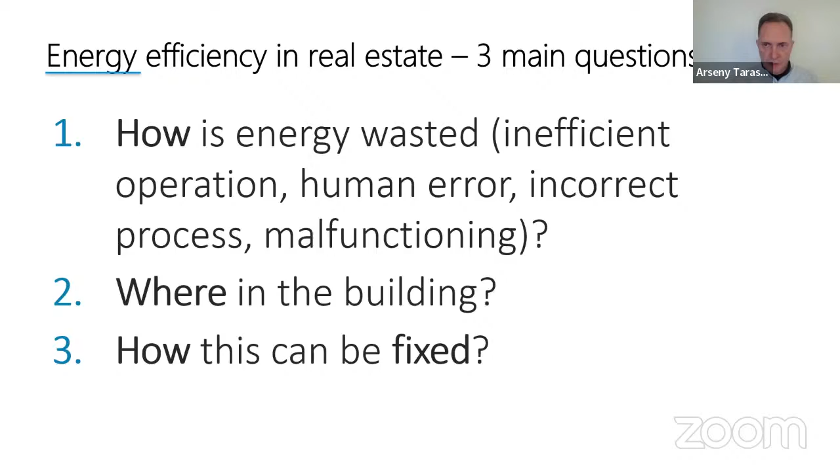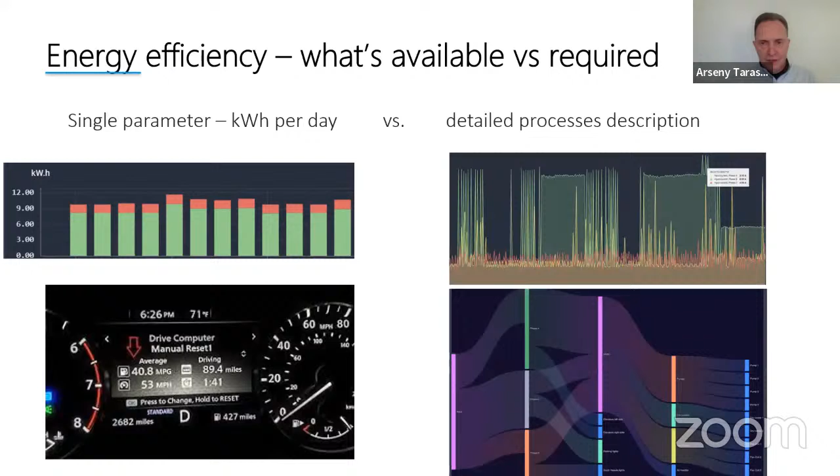A lot of companies say, okay, we will give you an energy management system, and what they give you is really just one parameter, which is how many kilowatt hours you consume per day. It's important to understand, but it's not really the way you can analyze and make qualified decisions on how to optimize energy efficiency. It's like understanding your average fuel consumption in a car; it doesn't really give you detailed information for detailed decision making and actions.

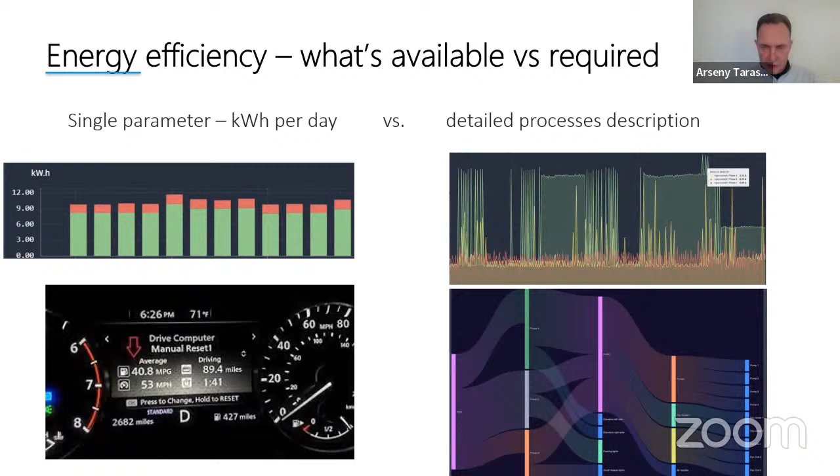But what you really need, in addition to that, is a full understanding of the processes happening in real time, energy distribution among different systems, so that based on this information you can make decisions and take actions. So this is the first thing.

Second thing is we see a lot of companies offering HVAC automation solutions. But in reality you need much more than that, because you need an overall energy processes management solution. If we talk about the car industry again, it's like offering just a chip tuning service compared to overall fleet management, fleet optimization, and route optimization. It's a complete solution, not just one process that needs to be taken care of. You need to look at the big picture to make sure everything is in tune and optimal. So this is very important.

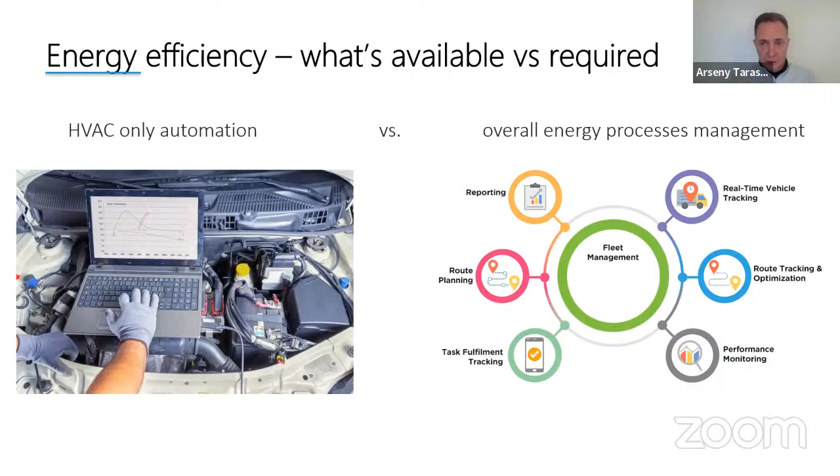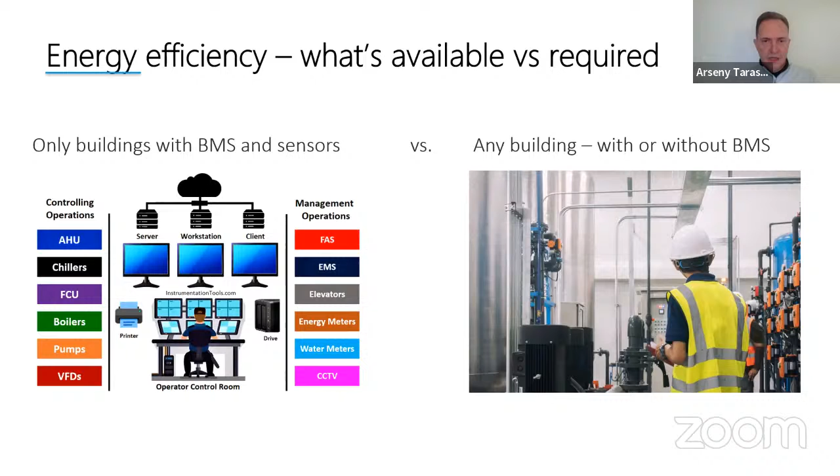Next topic: most of the solutions available right now require an existing BMS system and sensors implemented. But I would say the majority of the built environment doesn't have complicated and expensive BMS installed. However, these buildings also need energy efficiency actions and initiatives. So this is really a big issue we see in the industry.

Another reality we currently see in the market is that energy efficiency solutions seem to be only for new buildings, where you have all the fantastic systems and required equipment installed. But basically any building requires energy efficiency initiatives, and this is what's lacking in the market right now. That's why we focused on these important demands from the market and what's really missing, and that's why we came up with a solution that I will talk about right now.

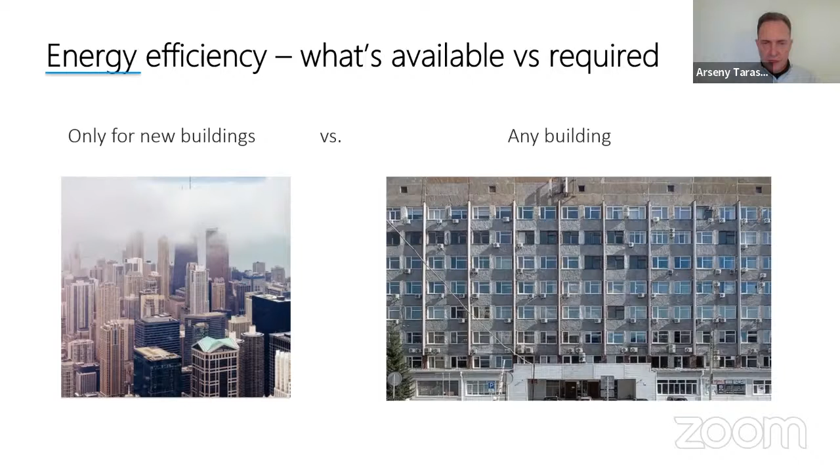If you look at the current challenges, in addition to what we've just discussed, it's really a lack of transparency. When you see that the building consumes too much energy, the question is, why is that? What is the cause? What's really happening inside the building, not just one number per month, but what's really going on. Normally with existing systems, it's very hard to understand and to get.

Second issue is that there aren't really a lot of professionals who can analyze the current situation and make decisions and corrective actions to improve it, because this was never a big issue before. Therefore, there are very few professionals who can do it.

Another important challenge we see is a lack of simple and affordable solutions that can solve energy efficiency problems and help decision makers implement cost optimization initiatives. There are super expensive systems, equipment, and services you can buy from the market, but this is not what most companies, especially smaller ones, need to run their energy efficiency initiatives.

In the end, energy efficiency is not just about the amount of energy you spend, but also about what kind of energy you consume in the buildings. This is another issue, as in Europe we've had a lot of concerns about the transition from gas to electricity and other sources of energy. This is also a big issue for the market. So we see these key concerns in addition to what I've just discussed.

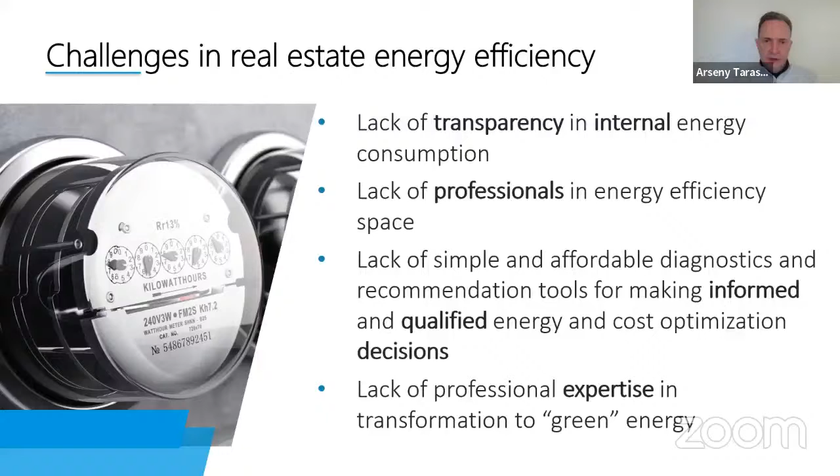Therefore, we have developed our own solution and platform that really focuses on these key ideas. First is creating cost-effective and non-intrusive big data collection, because, as we say, you cannot manage or optimize anything unless you measure it. So the collection of big data in any building is the main topic. The second approach is obviously real-time analytics and optimization based on the big data, which is really the foundation for future analysis and recommendations.

And we add on top of that our experience both in real estate design and maintenance, as well as digital industry experience. If you look at the medical care analogy, it's really like if you wanted to diagnose and heal someone, you could only have a very limited number of data points and measurements. But now with high performance sportsmen and high performance people, you can measure all the necessary healthcare data online using the newest technology, and then optimize the operations and the behavior. So this is super critical.

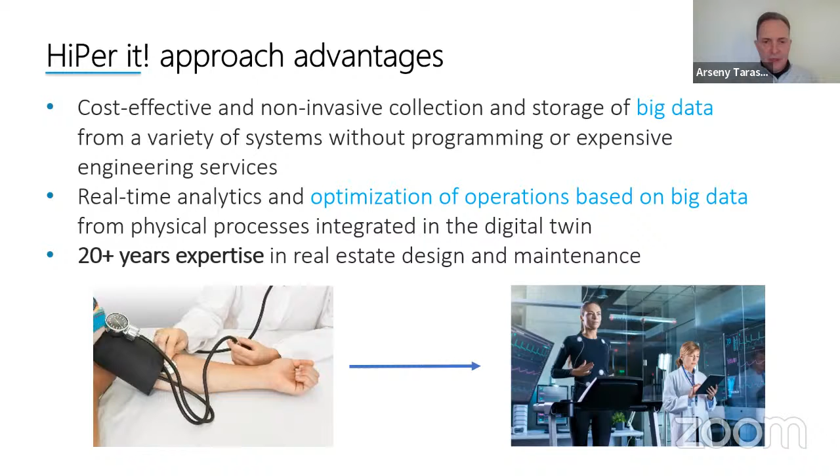Now moving to the actual solution. We've developed a platform called HiPerWare. It's an end-to-end platform, and we developed the hardware for very economic and non-invasive big data collection about energy processes and operational processes in the building. You can see it right here on the left side.

Then it's basically a cloud solution, either private or public, that can be used from public cloud or installed in your own private cloud. And it's integrated with other systems through API, and one of the integrations is obviously with ORDIN, our partner in the area of facility management.

We really focused on what we call not shiny buildings - not those expensive, huge skyscrapers with multi-million euro investments, but really normal buildings where owners and facility managers are very concerned about costs. Therefore, there are very few systems actually implemented to help understand what's going on internally.

So really, HiPerWare is what we call a tool and analytics that gives much more than a naked eye view. Normally, you may have someone who gets some sort of understanding of what's going on internally in terms of operations and energy consumption, but we give much more than that.

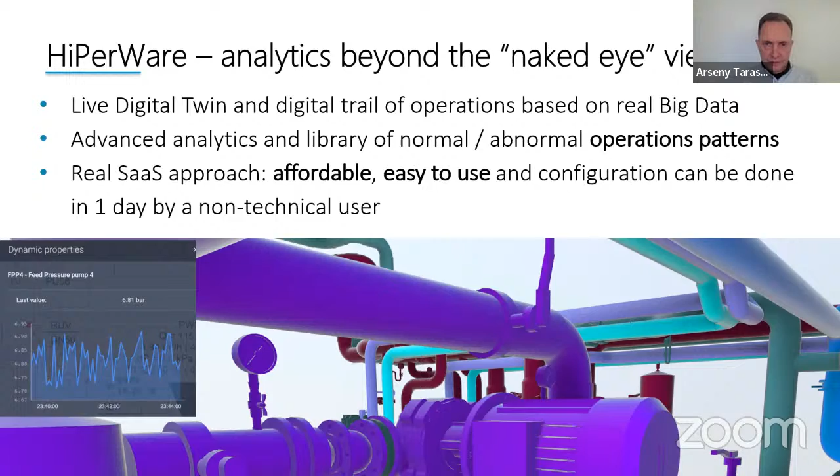In terms of our solution portfolio, everything is based on HiPerWare as a data collection, analytics and reporting module. But on top of that, we have two types of services. One is a one-time service called Checkup, where customers ask us to come do a one-time checkup, understand what are the potential issues, what's wrong with running the equipment and internal processes, and then we provide a one-time report with findings about what's going on.

However, if we talk about energy efficiency, most companies are looking for an ongoing service, which we call energy efficiency as a service. This is basically giving you your own energy manager who takes care of all the data collection, analytics, recommendations, and notifications - everything required to make sure you can achieve and sustain high energy efficiency performance. Through integration with ORDIN, you have a very strong tool to make sure everything recommended and all notifications are properly managed and controlled.

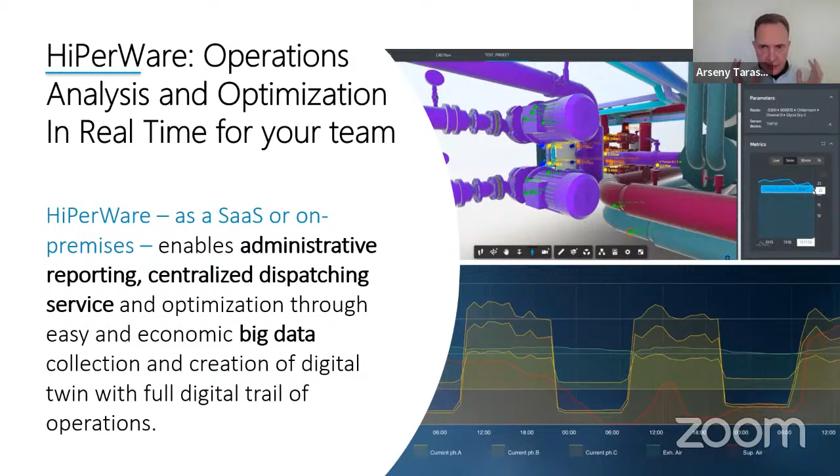So just to summarize a few words about the tool. HiPerWare is the platform that can be used by your own team to do analysis, optimization, and reporting. It's the collection of big data, creating a digital trail of operations, and creating the digital twin. HiPerWare can provide you a lot of information in one single platform with a lot of configurable dashboards.

It can show energy consumption details, energy consumption peaks. You can build a dashboard that allows you to compare energy consumption in different systems, compare different processes, and based on that, make some important decisions.

It also has a notification engine that is run using rules that you set up for yourself in the platform. Based on the big data we collect, either from a BIM model, 360 degree photographs, 2D diagrams, or single line diagrams, we create a live digital twin, so it's easier for maintenance teams to analyze and make corrective actions in the building.

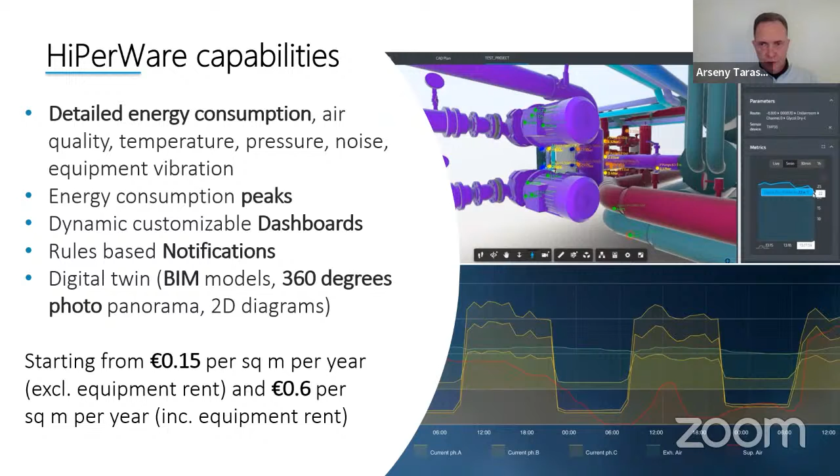It's a very affordable price, as you can see on the screen. As with any SaaS solution, you can start implementation very quickly. It takes a few days to install, and then you can start using it.

So here is an example of a dashboard, really giving you a lot of information, how energy is consumed, what kind of processes you have in real time. There are all sorts of data that would be super useful for your energy analytics team.

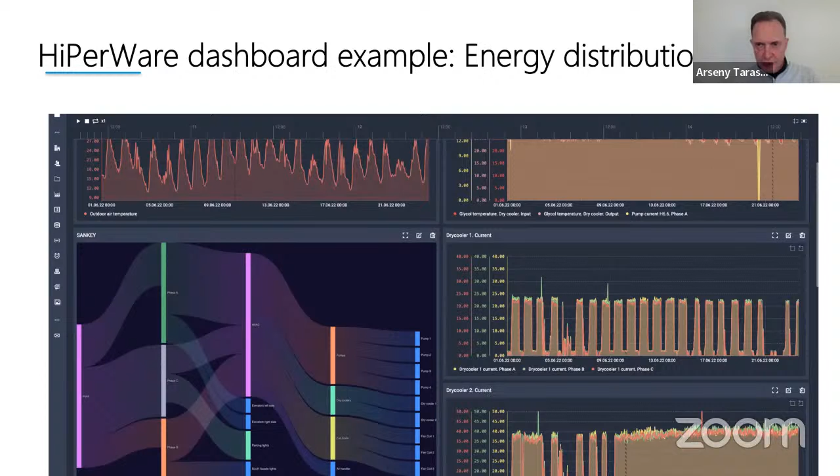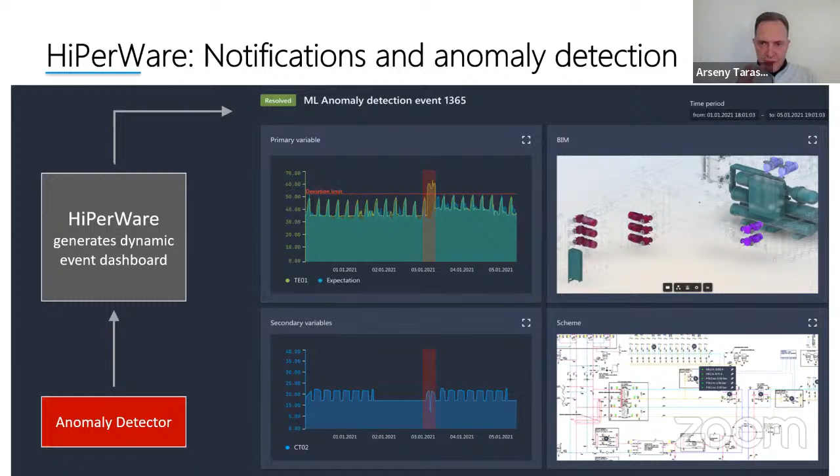This allows the maintenance team to react to such notifications and recommendations quickly and not waste time understanding what's going on or where it is. Then it's much easier to find this particular object in the building using a digital twin. So let me give you an example of how it looks in ORDIN.

We pass a URL to ORDIN, and then automatically a work order is created. Dennis will speak about this in more detail with a demonstration. It works both on a desktop and mobile version of the system.

Just a few details about our HiPer Power service, which, as I said, is kind of your own energy manager if you don't have one. It's an efficient energy as a service offering where we achieve up to 20% reduction of costs. In some cases, we manage to achieve 90% reduction, for example, of gas consumption by switching to green energy.

This is a very useful tool for you as a decision maker, because you get reports on a regular basis and ad hoc notifications when needed, when there's a certain action item that needs to be taken care of immediately. So it's regular reports, notifications and recommendations, and continuous analysis of what's going on.

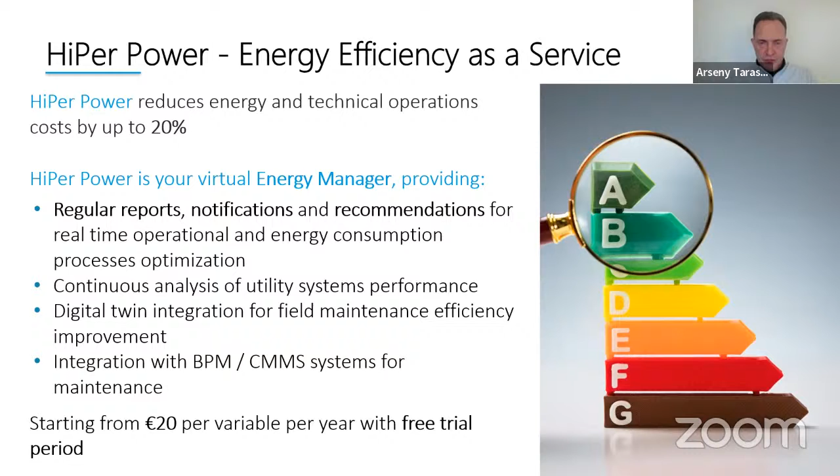This is done by our platform and our analytical team that creates those recommendations for you. Through integration with ORDIN, it's a very trackable and controlled environment where every recommendation, every action item can be taken care of and then automatically dispatched to your team members.

You also get a digital trail of operations to make sure everything is under control and documented. So there are things like kilowatt hours reports, diagrams of energy consumption, and Sankey diagrams for different systems in the building. Okay, so that was a quick overview of the solution.

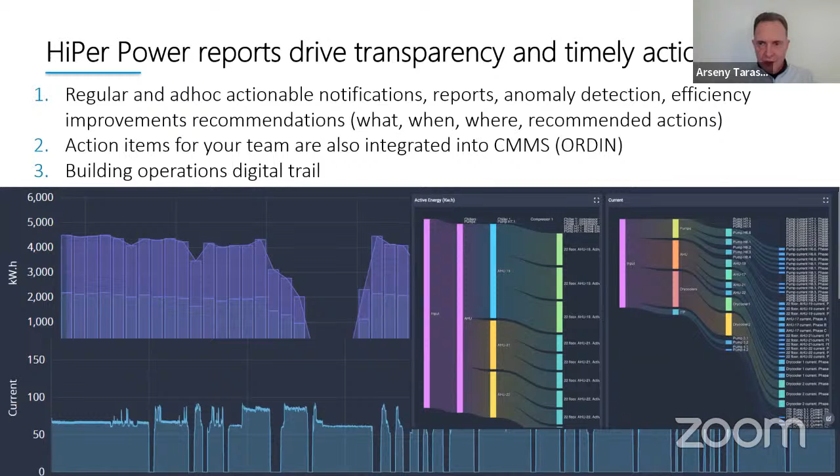Let me now go through use cases to demonstrate that energy efficiency is not just about HVAC automation or one number, which is how many kilowatt hours you spend per day. So let's get right into it.

First, I wanted to give an example from the US, and there's a very interesting article about this. They saved, just by installing the sub-metering system and making sure every important data is stored, they achieved a 6% decrease in energy consumption, because the discipline in the team grew dramatically as everybody understood there is a digital trail of all actions and transactions in terms of energy consumption. So just having this system in the building, a hospital in the US managed to reduce energy consumption by 6%.

So more details you'll see in this case study.

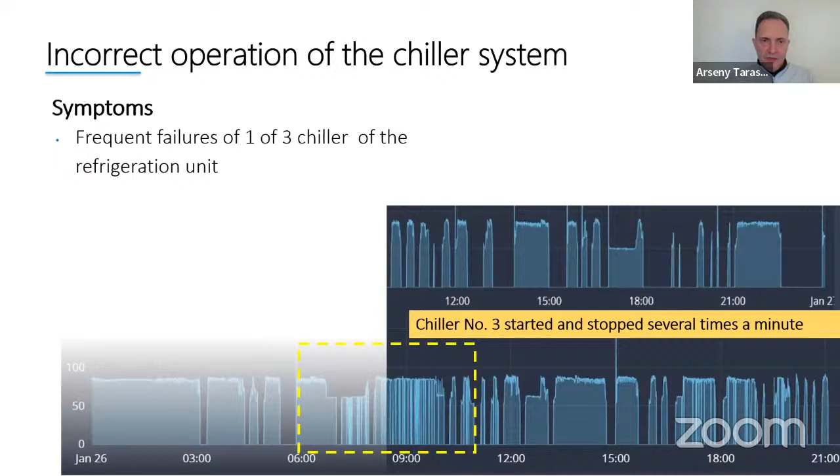Another example is a project we realized at a chilling warehouse, where the temperature had to be maintained at minus 18 degrees. From the users' standpoint everything was okay, except one of the chillers was running out and had to be repaired much more often than the other two. It looked like there were too many peaks in energy consumption, and consumption at that warehouse was higher than similar buildings with similar equipment, so they couldn't understand what was going on.

When we analyzed the performance of these three big chillers needed to achieve minus 18 degrees, we found the first and second chillers worked fine - you can see what we call the electrocardiogram here, no problems. But chiller number 3 demonstrated really unusual and abnormal behavior in how it was operating. It's a typical issue, but they could not understand it without this detailed diagnostic tool.

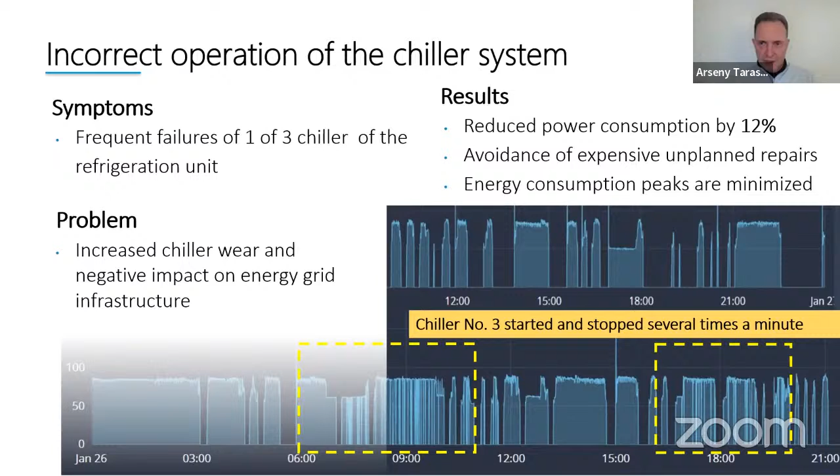By fixing this, the company managed to reduce energy consumption by 12%. But what's also very important is they avoided very expensive and unplanned repairs of chiller number 3, which had always been an issue they couldn't understand. The issue, as we identified, was that the automation was programmed incorrectly from the very beginning. So for several years this was an issue they couldn't explain.

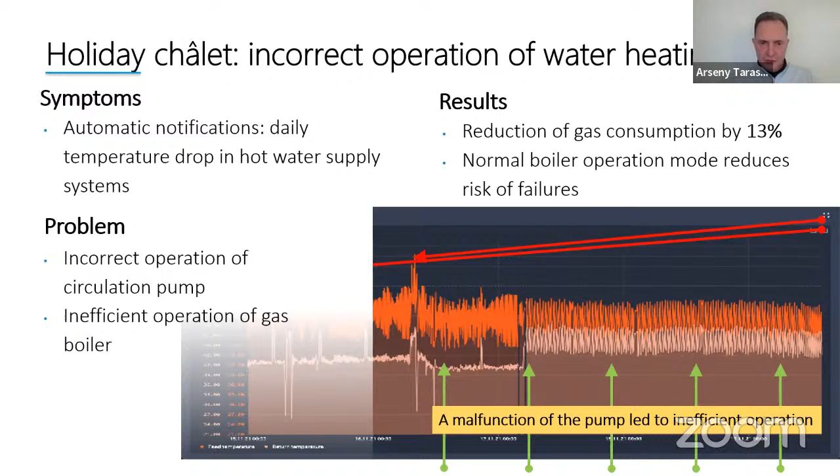Very interesting example. Another example, also with the holiday chalet, was based on human error - the management company forgot to turn off the roof ice melting system, which was consuming over 9 kilowatts of energy, and they just forgot to turn it off for summer. When we showed them the graph of energy consumption, they were shocked, because it's quite an important piece of the overall energy balance that wasn't taken care of - they just forgot about it.

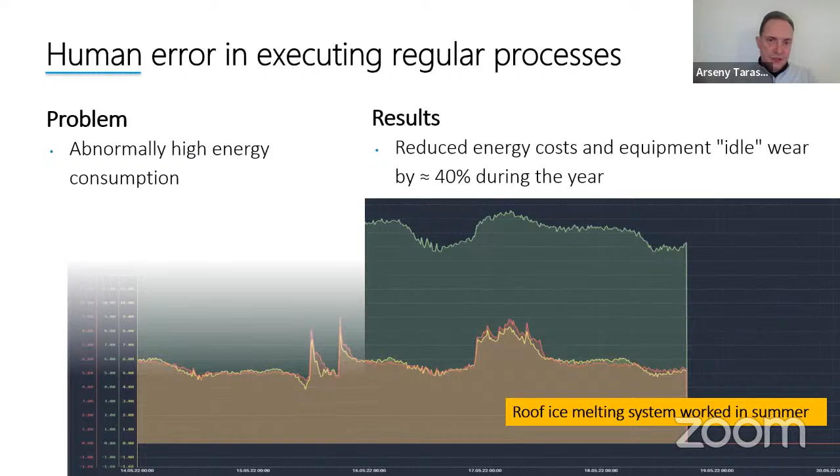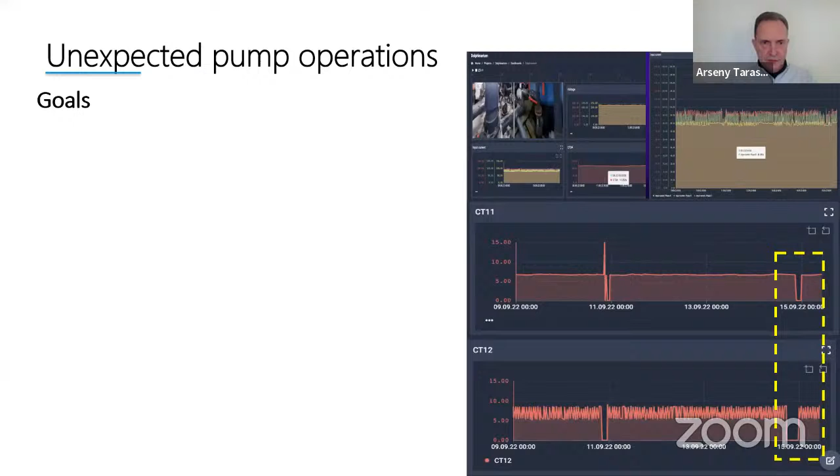Another example is not about energy efficiency, but about understanding and having a complete digital trail of operations. This example comes from Dubai Delphinarium. For the owners it's critical that water quality in the Delphinarium is sustained at a very high level, because this is critical for the business and for the animals. We implemented a solution to create a digital trail of operations so there are no unpleasant surprises, and everything runs fine.

Surprisingly, we identified an issue with the operation of the water pumps, which was completely unexpected for the owners. When they looked at that, it triggered certain maintenance procedures and activities to make sure such things don't happen in the future. Again, this is a great tool - a digital trail to understand what's really going on and fix issues before they become critical.

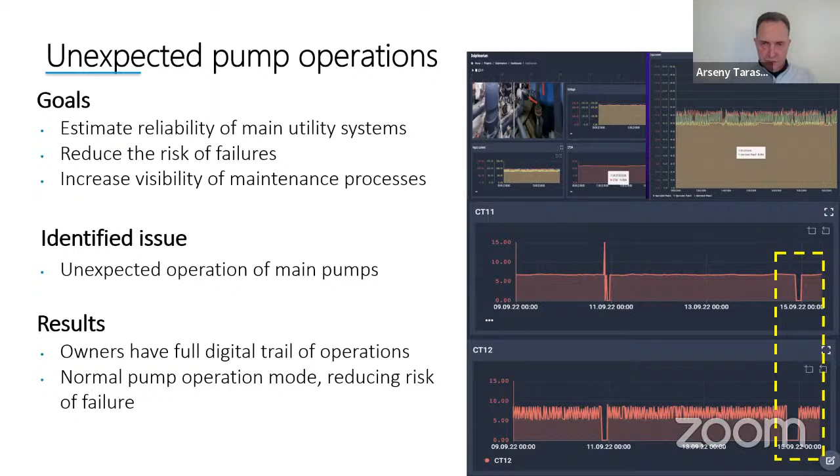Another example I wanted to give you is about a gas boiler in a residential complex. The idea was that with the new gas boiler, after the loss of energy in the building, the automatics of the gas boiler went crazy. Instead of working as it should, the pattern of operation changed dramatically. Again, it shouldn't happen - normally everything should be fine, but somehow, once in a lifetime, after an energy blackout, this happens.

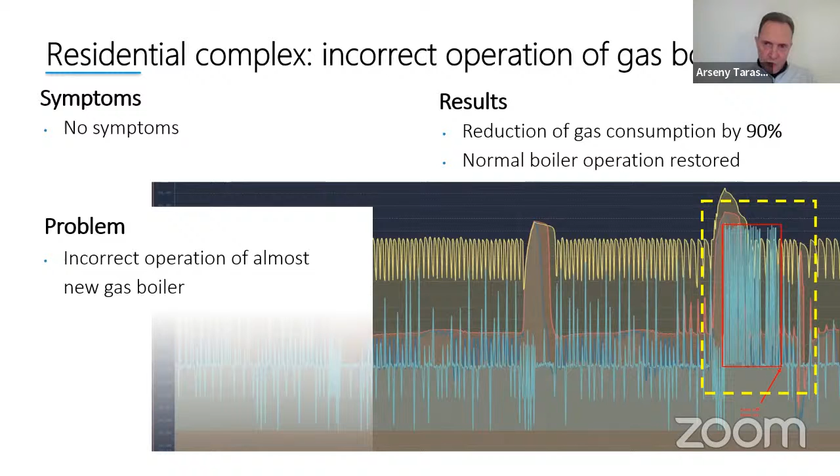We could basically find out about this issue and realize that the gas boiler worked in the wrong mode, and managed to switch it back and reprogram it to the way it should be. So that's another example of having a nice diagnostic tool that helps you really understand what's going on and not just hope that everything runs as it should.

Another example is a project that we've run with Enerbuild, a project of Climate KIC, one of the committees of the European Commission. The focus was also to minimize energy consumption. This particular case was in Gran Canaria, and we worked on energy efficiency of one of the hospitals there.

We analyzed a number of cases together with students from Gran Canaria. It was a great project where we joined forces with local students who helped analyze different energy consumption trends. In this particular case, we analyzed the operation of a professional dishwasher - not your home dishwasher, it's a really big dishwashing machine.

You can see there are some anomalies in the way this dishwasher was running. This is a normal operation, and these are anomalies, meaning there was a certain issue in the way this dishwasher works. So it's not only about energy consumption, but also about potential risk of failure, which would cost a lot of money to repair - it's a big piece of equipment.

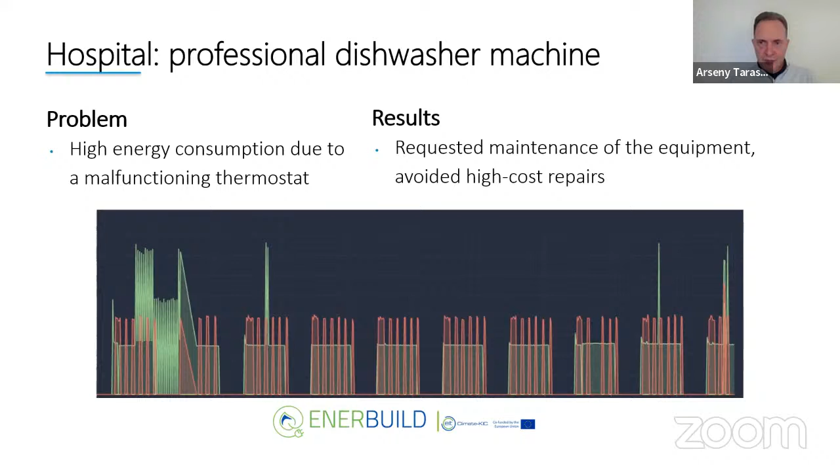Another example is lighting. In this particular case, you can see that sometimes lights go off for the night and sometimes not. At the same time, if you look at the level of energy consumption for lighting, it's way too high. So it's a very good example of how you can analyze this particular consumer of energy, lighting, and give recommendations about improving the processes.

On the other hand, it's about making a business case for replacement of technology. Using this particular graph, it's easy to understand that replacing the old lighting system with new LED would actually save money in the very short term. So this is a great tool for that.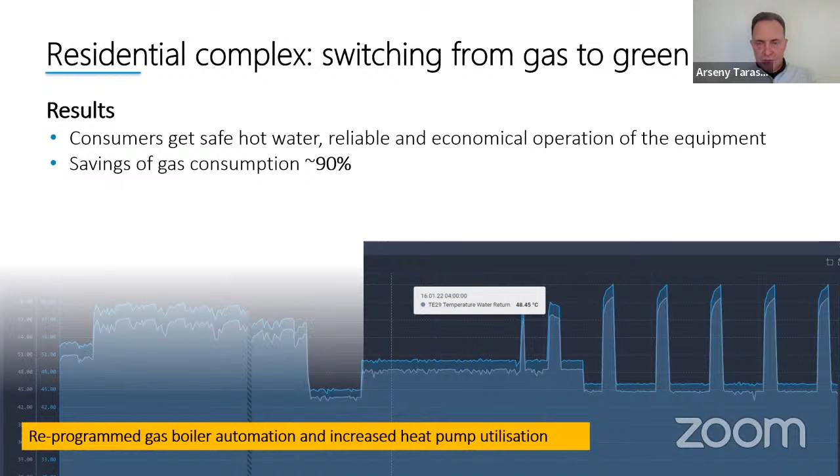But there was another interesting process, because we implemented heat pump technology, which is great and should work fine, but we didn't realize that with any new technology there could be issues. The issue was that during 6 months of operation, we had 9 failures of the heat pump, which is quite unusual. The problem is that even with this technology, you are supposed to have maintenance notifications.

That never happened, despite the fact that the vendor of the heat pump promised to provide this kind of service. So when the heat pump fails, the system switches back to gas, meaning all the savings from using heat pumps are gone. For us, it was critical that we get information about heat pump failures immediately, as soon as they happen, so we could fix them and ensure we still consume green energy instead of gas.

So through the use of the platform and through notifications and analytics, we ensured efficient operation of the heat pump and also reduced the vendor service fees for maintenance and repairs.

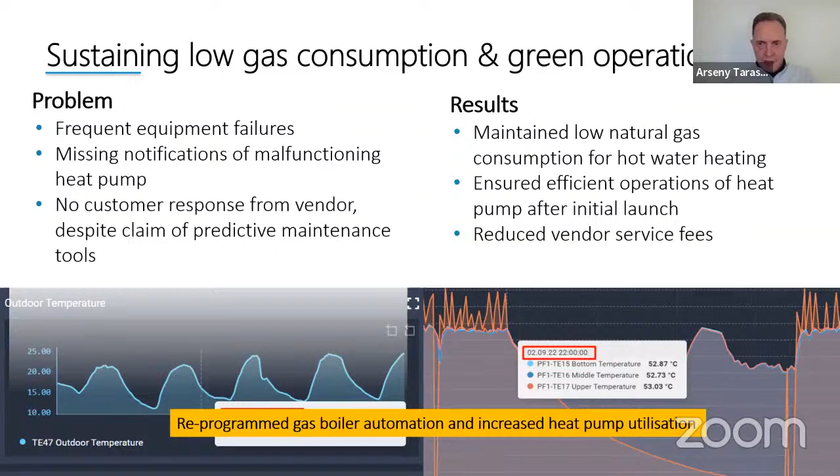So that's another example. In this particular case, we saved approximately 40% of gas consumption just because we managed to keep the heat pump working instead of using gas for water heating. It's another interesting case showing there are many possible scenarios of energy inefficiency in a building. But once you have the big data and understand what's going on, this is a great tool for analyzing and making the right recommendations for energy efficiency.

So before I pass it over to Dennis, I'd like to make a summary. Basically, any optimization starts with getting data and understanding what's going on. The big data and industrial IoT technologies are the main tools for doing this. Once we have the data, we build a digital twin and digital trail of operations, and this allows us to make efficient operations and the right decisions to make old and new buildings, with or without BMS, more energy efficient. So digital trail and digital twin is really a great tool for doing this.

And we have two types of solutions. One is the HyperWare platform - basically a tool we give to your own professionals who are looking for ways to optimize energy consumption. If you don't have such a team on board, we can offer a HyperPower service - your own energy manager, so that you can save starting from month one. This is really something people are looking for. As we said, there's a lack of professionals and lack of tools. So with this service, you get everything from one solution, one platform. This is the end of my presentation.